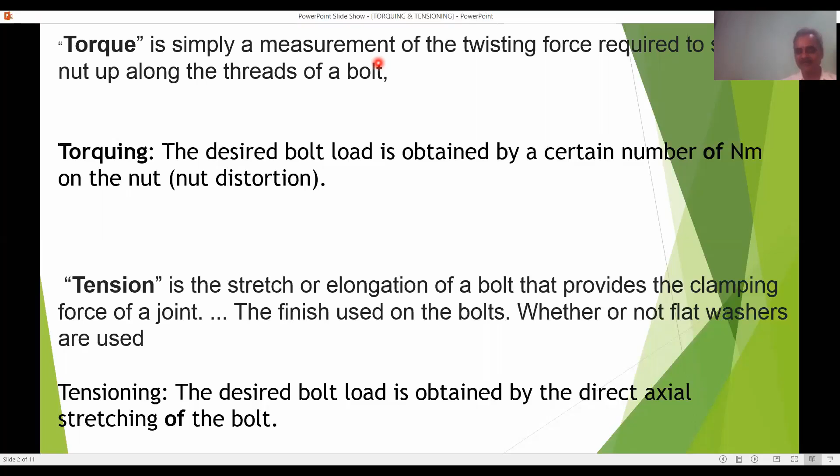Hydraulic tensioning, there are methods. Bolts, hydraulic tensioning and torquing tools. So, there are 4 steps. Hydraulic tensioning, a general procedure. Step 1, the bolt tensioner is fitted over the stud. Step 2, hydraulic pressure is applied to the tensioner, which then stretches the stud. Step 3, the stud's nut is wound down against the joint face. Step 4, pressure is released and the tool is removed.

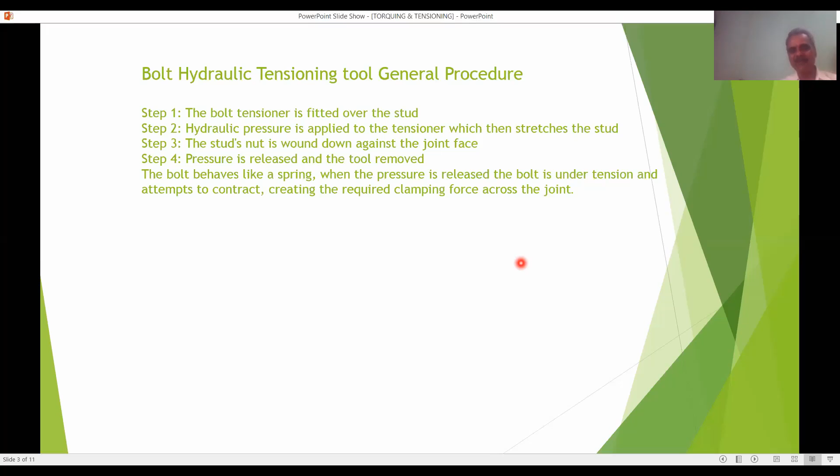The bolt behaves like a spring. When the pressure is released, the bolt is under tension and attempts to contract, creating the required clamping force across the joint. You can see the steps. Step 1, Step 2, Step 3, Step 4. Understand? Step 1, the bolt tensioner is fitted over the stud. This is a stud. They are fitting this tensioner.

Hydraulic pressure is applied to the tensioner, which then stretches the stud. The stud will be stretched up. The stud nut is wound down against the joint face. See step 3. This is the gap. Now we can apply step 4. Pressure is released and the tool is removed. Okay.

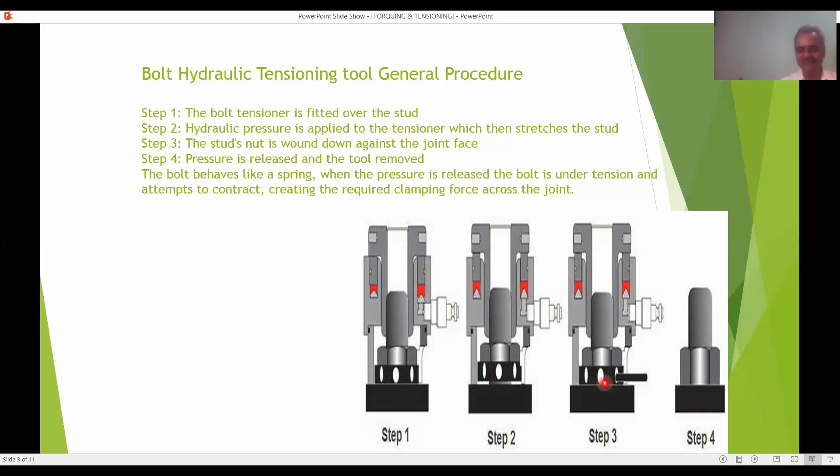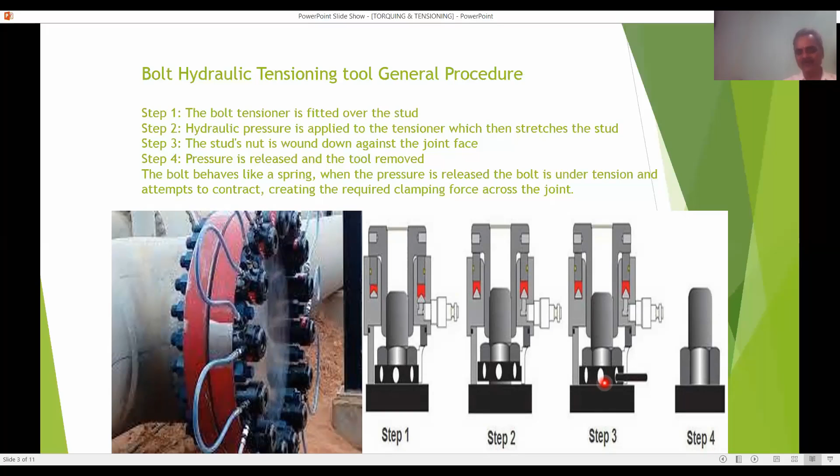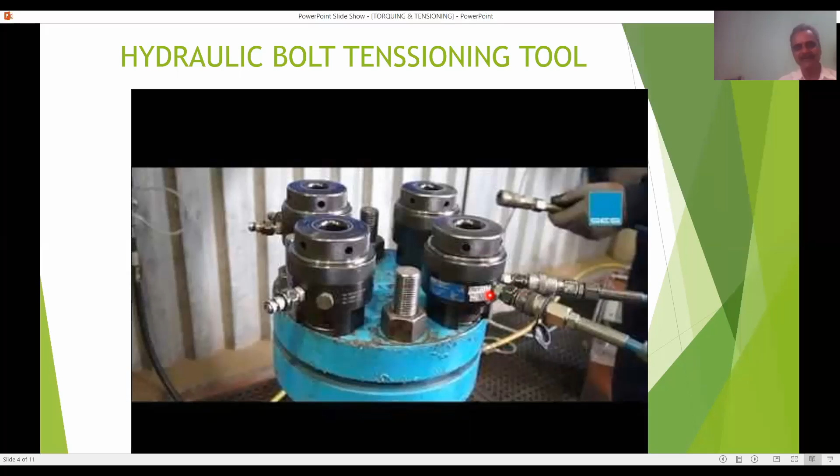This is the hydraulic tensioning tool. Mostly it is used on 1.5 inch diameter and above studs. This is the hydraulic tensioning tool. Adapters, pneumatic driven. So this is a very easy job. Very carefully you have to apply. Only thing, you are playing with the pneumatic pressures.

So ensure the material control, competent personnel, documented procedure, and ensure that it is hydro tested, integrity tested, and ensure that there are records for all the bolt joints. Weld joint, material control, whether it has been welded by a qualified welder or not, whether there is a documented procedure, NDT verification completed, hydro tested, and records. Verify the records before doing either tensioning or torquing.

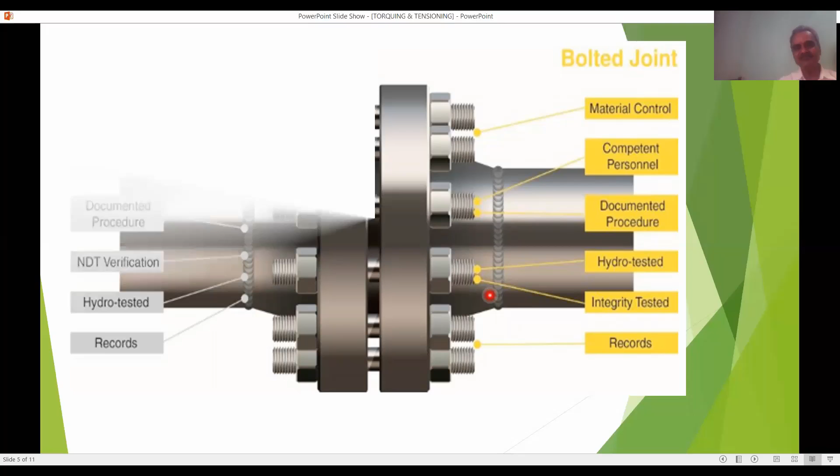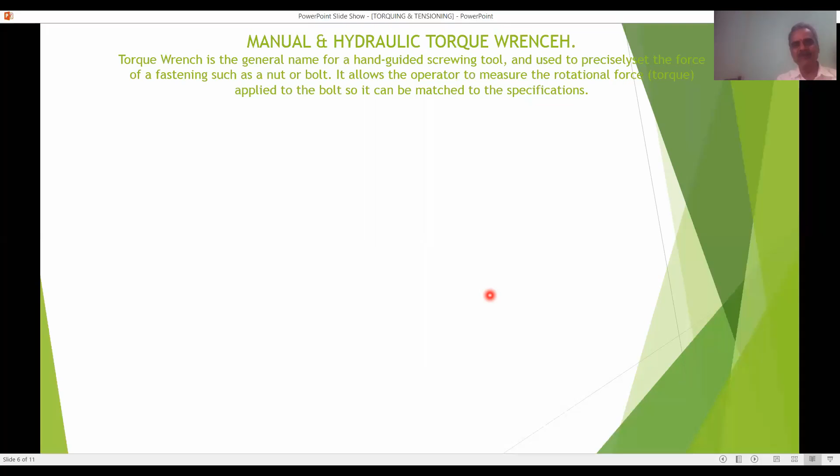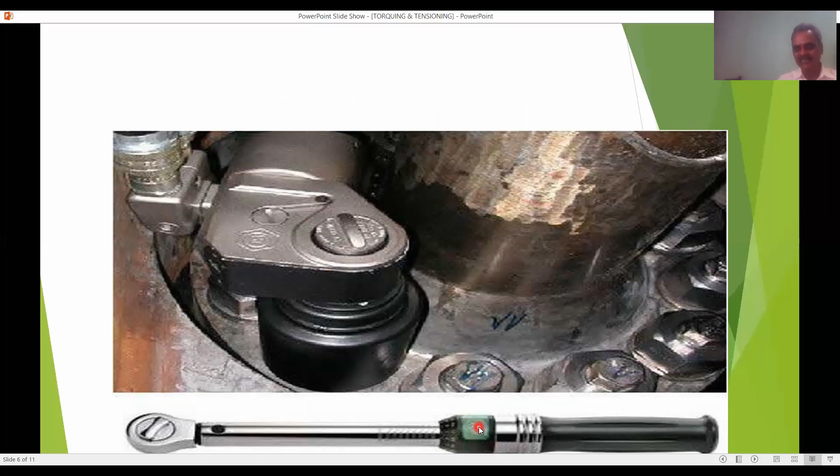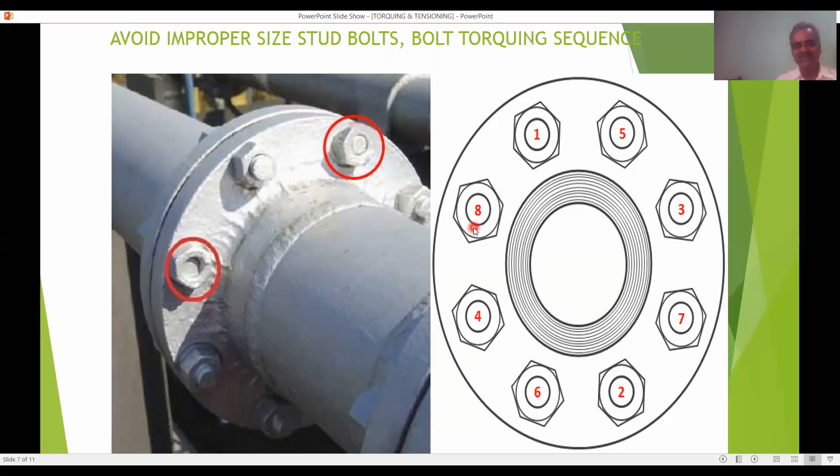There is a sequence of tightening. This is a sequence: 1, 2, 3, 4, 5, 6, 7, 8. Only this sequence you have to apply while torquing or tensioning. Okay, my friends.

Now let us learn what is a dry bolt, dry torque. Dry torque is a torque specification given to a fastener that has no lubrication added. This is most bolts and most applications. Okay. Now let us learn wet torque. Wet torque is a torque specification given to a fastener where lubrication is added. This is for spark plugs, fasteners in very high temperature, corrosive conditions, and also heavy equipment tracks.

When applying torque to a dry bolt, more friction is created than applying torque to a wet bolt with oil or other automotive fluids on the threads. With less friction, wet threads, the bolt will stretch more before a torque wrench will click, because friction is such a big factor in bolt torque. It is most important to know the difference between applying torque to a dry bolt and a wet bolt. Using oil and anti-seize or other types of thread lubricant is a common practice, but an understanding that wet threads require less torque than dry threads because of friction is very important. Is it clear, my friends?

Mostly these wet bolts will be for normal applications, means water, any other metal to metal, when you are tightening structural bolts and liquid breakup joints. The dry torquing is required probably where there are gas transmission lines or gas piping.

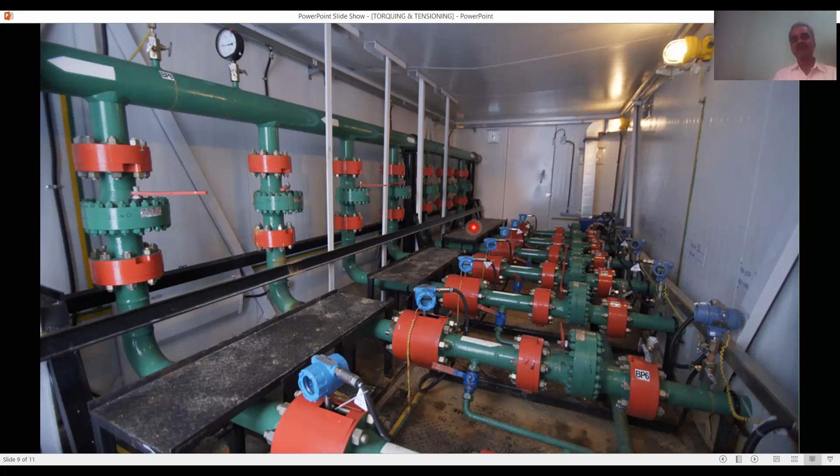Okay, now you can see this small plant with a lot of breakup joints. These breakup joints you can mark on the drawing itself towards the flow direction. Breakup joint 1, joint 2, joint 3, breakup joint 4, 5, 6, 7, 8, 9, 10, 11, 12. Like that you can mark. Once you mark the drawing, then make a record of it: the date of torquing or tensioning, type of bolt, material, breakup joint number, stud bolt details, and torque applied.

These things are most important for the next application when it is required to break open the flange joints. Whenever you require to break open the flange joint for maintenance purposes, you take out the record of the specific line number and see the breakup joints, which joint you are opening and what is the torque applied. Next, once you have completed maintenance activities, then you apply the same torque or tension.

See this small loop line, gas and water. What is the blue line? It is the water line, this is the gas line. On these gas lines, whenever you are applying torquing or tensioning, it should be a dry torque. Okay? You are not supposed to apply any lubrication. In this area, wherever the breakup flanges are, you can apply the specified lubrication. Okay, my friends? No confusion?